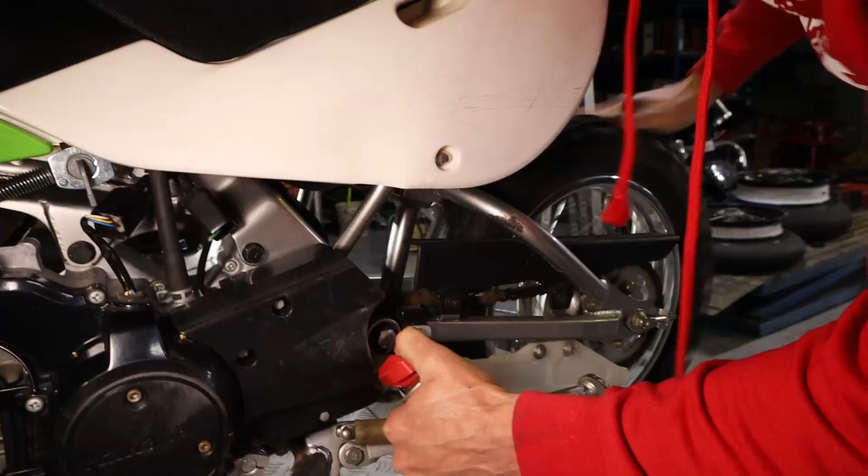Hey Roo, what are we up to today? We're going to be doing some dyno testing, hopefully making some ponies. We don't know what this makes, keeping in mind we've got to account for altitude and humidity, but these numbers on this dyno are what we'll be comparing to throughout the rest of the series.

What people need to bear in mind is that a dyno is just a tool. My dyno will read differently to someone else's dyno. There's guys out there whose bikes make a hundred thousand zillion million horsepower, but on this dyno it's pretty shy, it underreads quite a bit. That's not a problem though, because at the end of the day we're just comparing our own figures against our own figures.

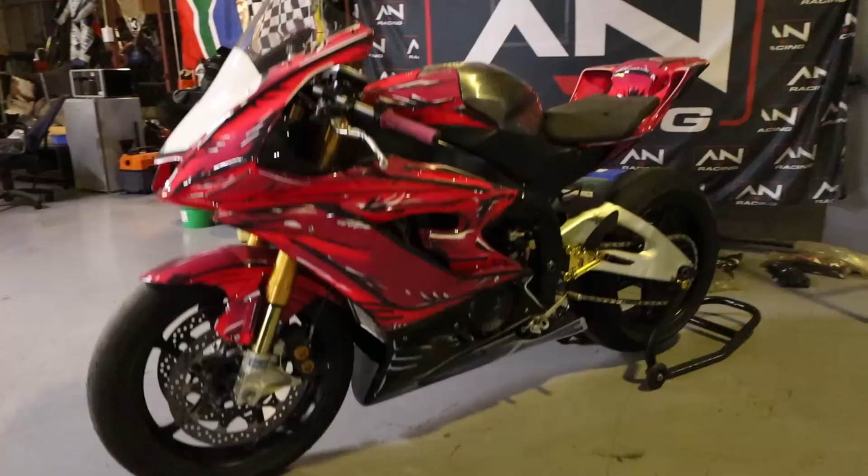So this is going to be stock KLX, stock figures. We also plan on drilling out the exhaust, and maybe trying out one or two little tricks. Yeah, some hillbilly backyard mechanics.

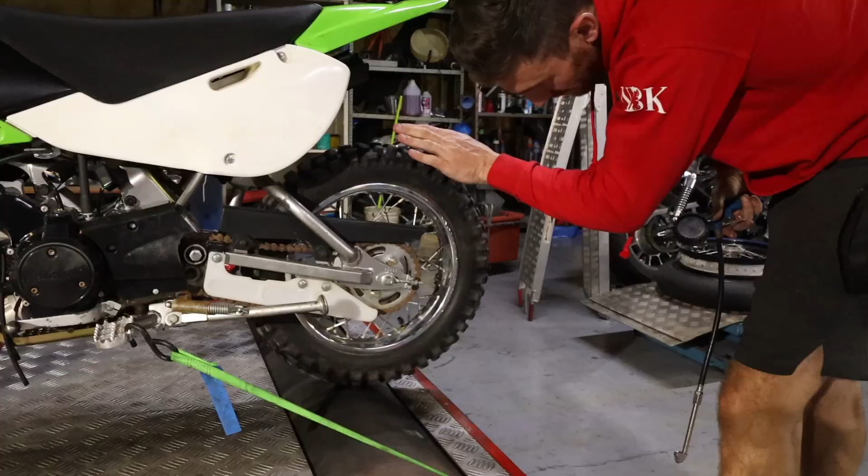Personally this is my first time dyno tuning, so I didn't know the process, but it's nice and quick. Aston just quickly calibrates the dyno to the bike, then it's time for some testing.

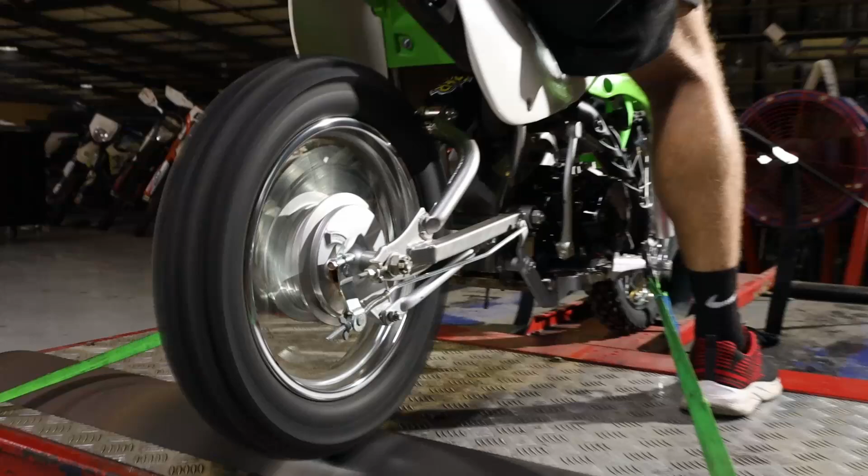Damn! Okay, let's see if we can give this another run. Okay, let's get it done.

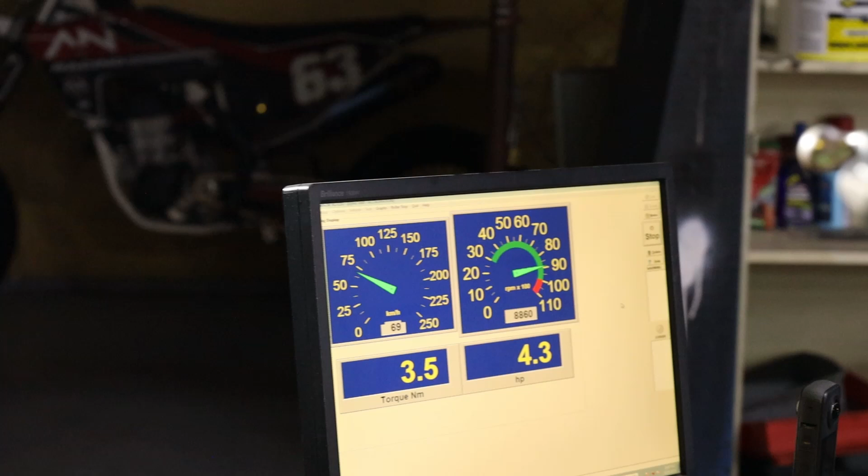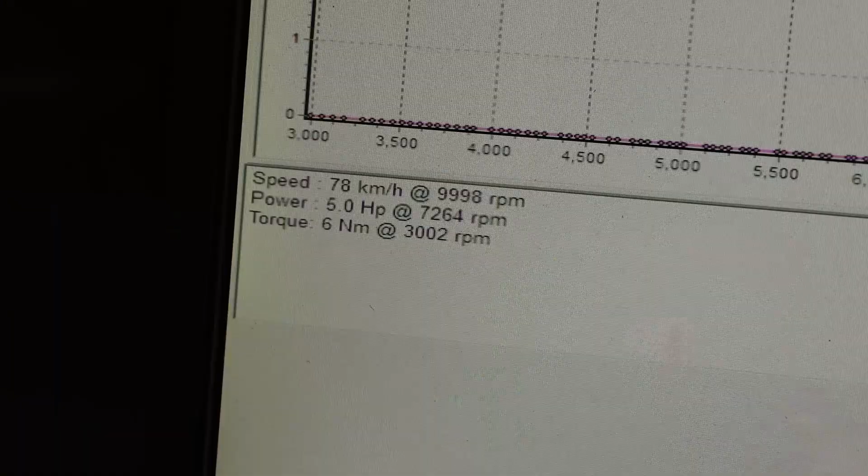Okay guys, looks like we've gotten 5 horses, 5 of them ponies. We're going to put a little bit of chain lube on. You saw how this chain looked earlier in the series, so hopefully we get a little bit more horsepower.

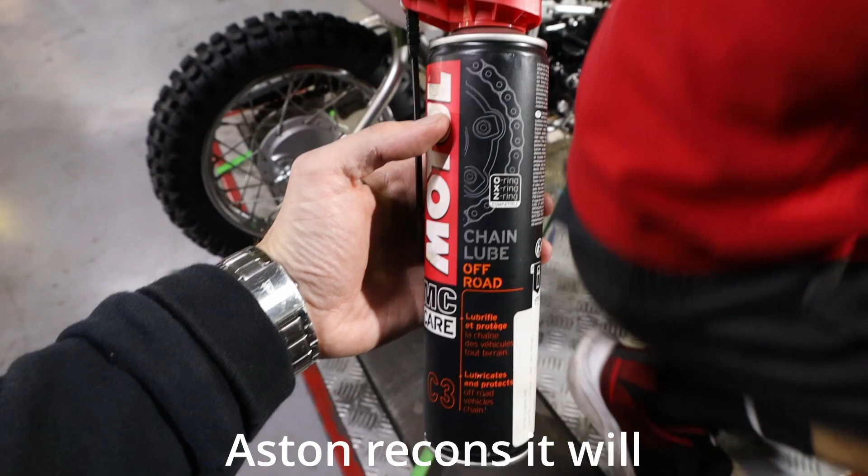Should do it. First run might be a bit down because it was idling now and the fan wasn't on.

Well, here we go, the proof's in the pudding. The chain lube works. So Motul, we're not sponsored by you, but if you do want to sponsor the channel in the future, we're always open to it.

5.3, okay, that I can't believe. We've actually gained like 0.3, 0.4 of a horsepower just by lubricating the chain. So every little bit's going to count on this build.

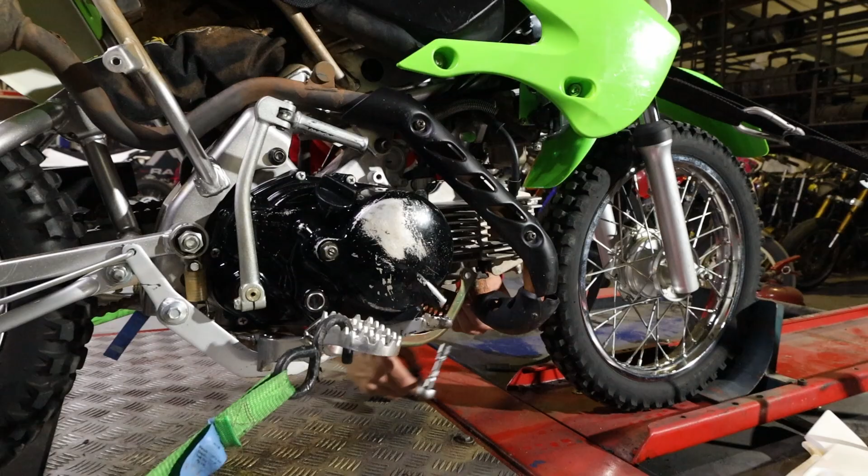We're actually about to pull the exhaust off and drill it out. Hopefully we make a little bit more power. Aston's busy pulling the pipe off now, we're going to try drill out that stock exhaust there and see if we can get any horsepower gains.

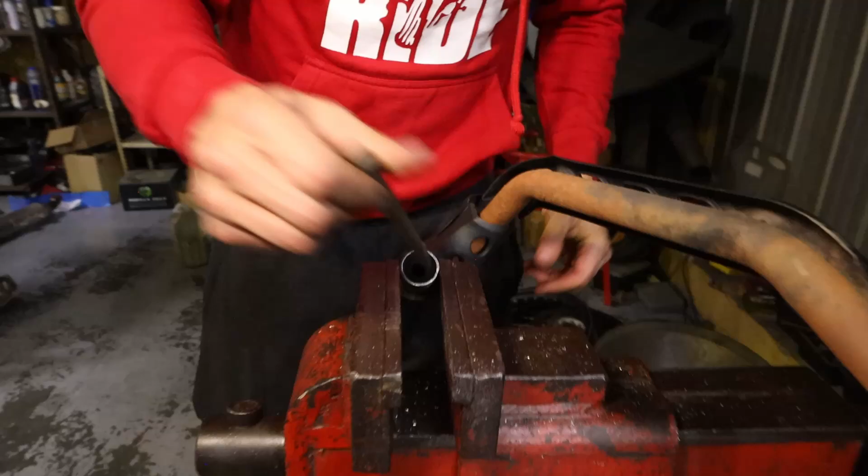Aston, what do you think about the stock exhaust hole here? I can't believe how small it is. No wonder it only made 5 horsepower. Shame man, it needs to breathe, brother. We need to make some power.

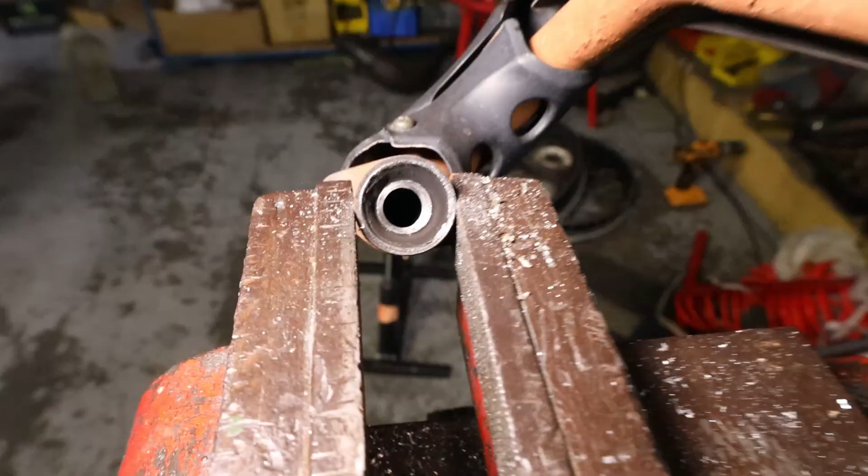Okay, so we're already making some space here, but we're going to go with the die grinder now, see what we can do.

Yeah, we see the red dot, now we're live, there's a red dot there. Alright sick, okay, we're going to do some predictions.

Aston, what do you think? I reckon we're going to gain another 0.6 of a horsepower. We started at 5.3, I think we're going to go to 5.9. Okay, Aston reckons probably about half a horsepower. We are still restricted at the back, but we've just opened up the front. So bear in mind, half a horsepower on 5 horsepower is like 10%, so that's actually massive. You think half a horsepower is not a lot, but on this bike it's huge.

Alrighty. Starting with nothing.

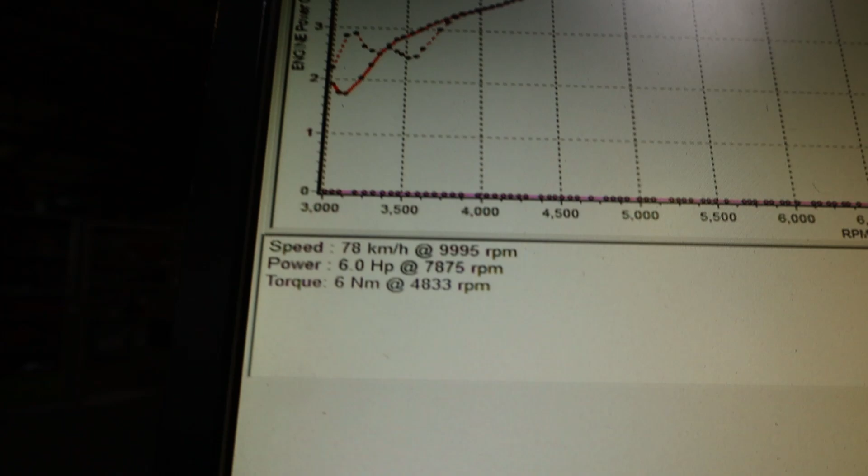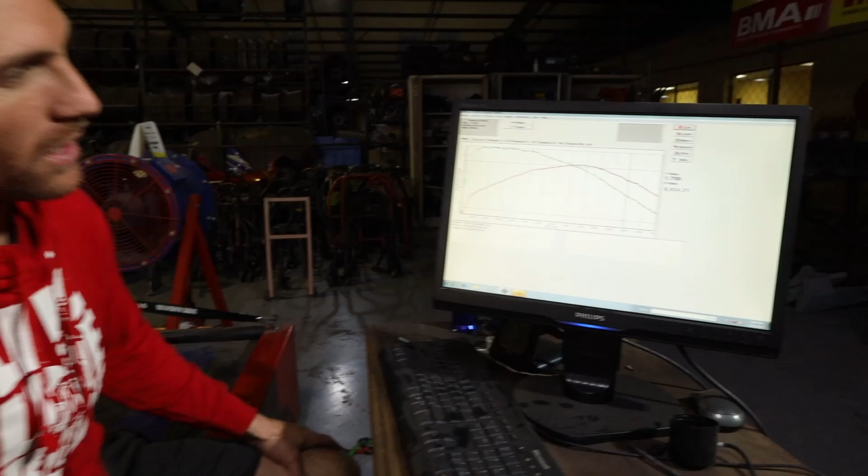Okay, sweet guys. So what we're looking at here, this is our base run. So we're sitting at 4.8 horsepower and 6 Newton meters of torque. The red line is your horsepower graph, and the green line is the torque.

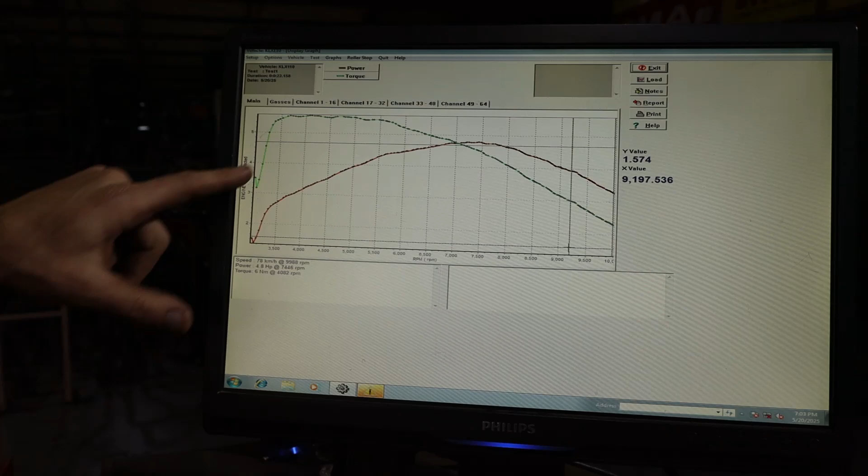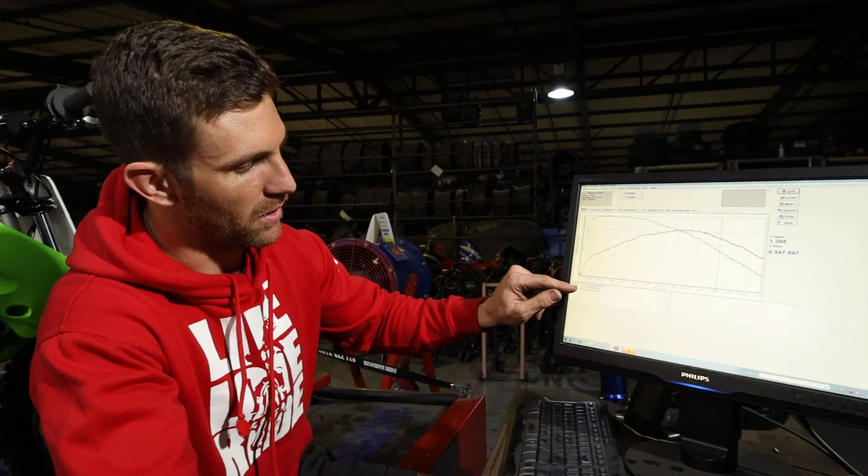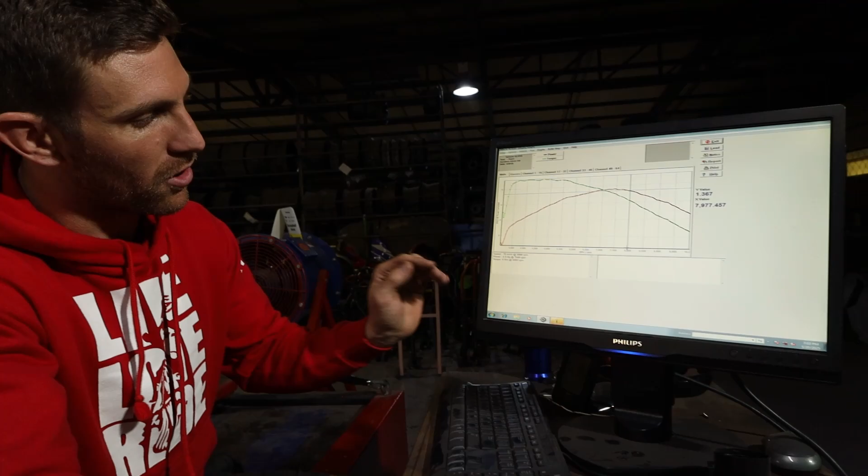So what you'll see is if you are measuring in horsepower and Newton meters, some guys measure in kilowatts and foot-pounds of torque. But with horsepower and Newton meters, your graphs always intersect at 7,000 RPM. So it's just a fun fact. Any dyno graph with horsepower and Newton meters, the graphs always intersect at 7,000, unless the graph is cut short. What we're looking at here is we started the run at 3,000 RPM.

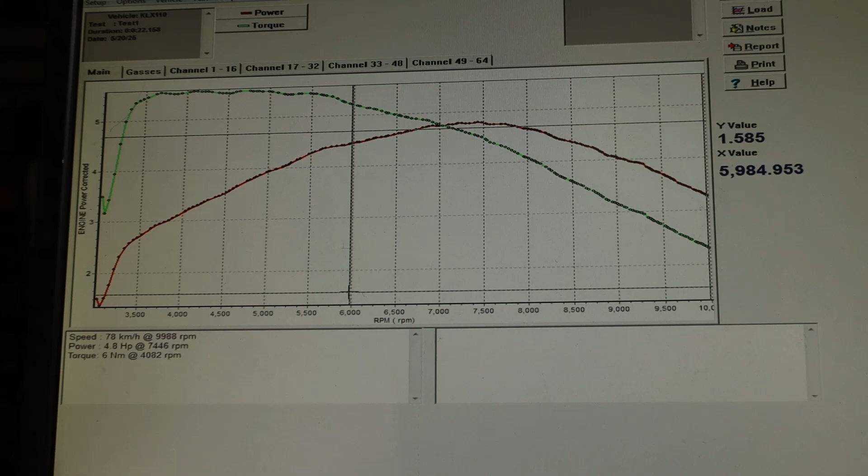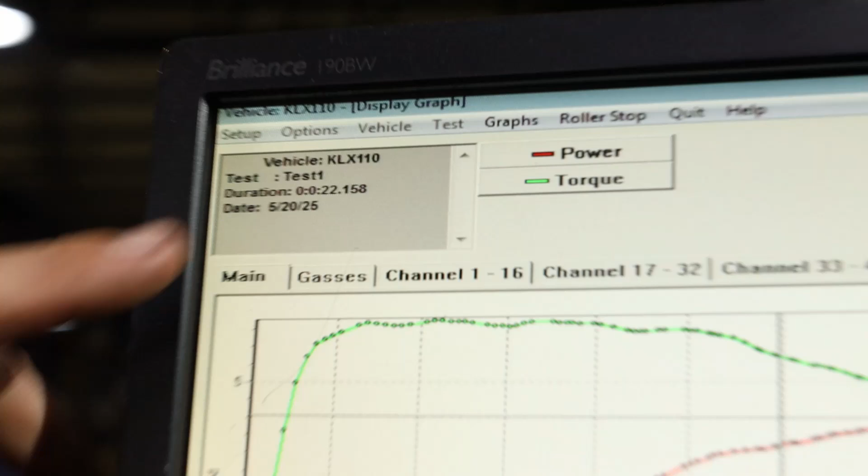We ran it to 10,000, and that gives us an elapsed time over that RPM range. So even if we don't see a change in horsepower or torque, we may see a change in the run time, which is always fun to look at. So what were we doing stock there? Stock is a 22.158 second run.

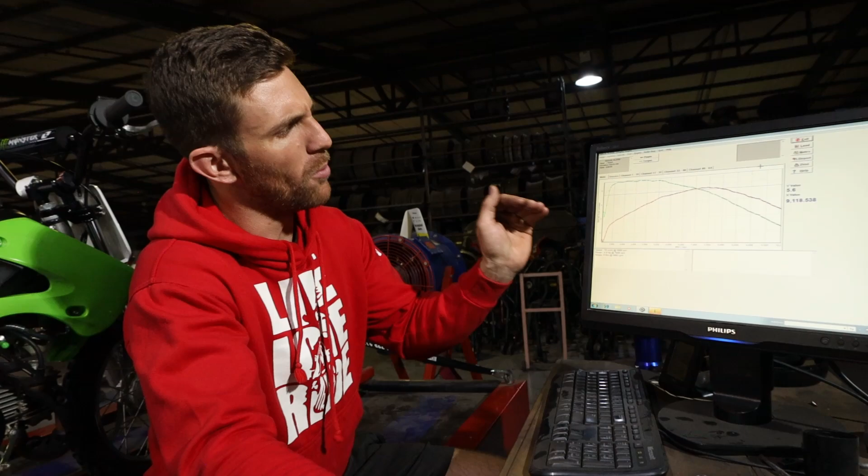Basically before we had lubed the chain, the bike will warm up and it'll probably gain 0.1 or 0.2 of a horsepower. But then after that we lubed the chain, and we got it from, let's see here, I think we got it from 5 horsepower to 5.3 horsepower. So this here is the difference.

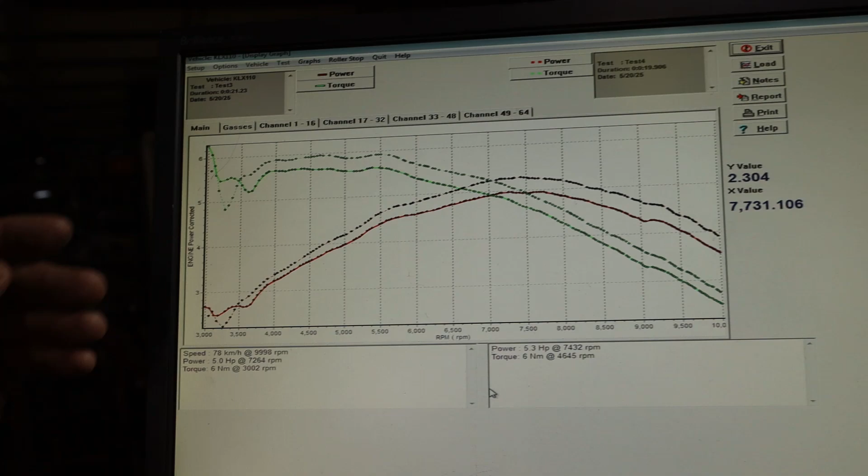So these are two graphs, two runs overlaid on top of one another. Your dotted lines are the run where we put the chain lube on, and the solid lines were the previous run, just before that. Okay, so already a pretty decent gain.

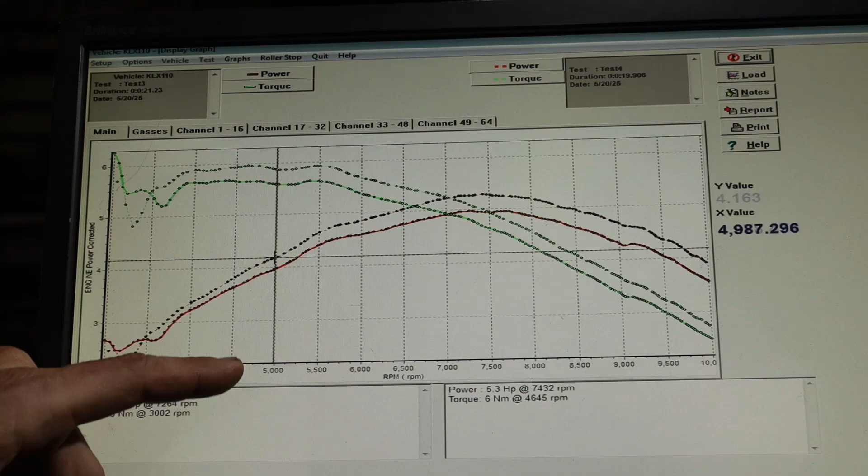Across the rev range, if you look at, let's say we take 5,000 RPM, with no chain lube, we are sitting at 3.9 horsepower, and then with the chain lube on, at the same RPM 5,000, wow, 4.163 horsepower. So 0.3 horsepower gain basically across the board.

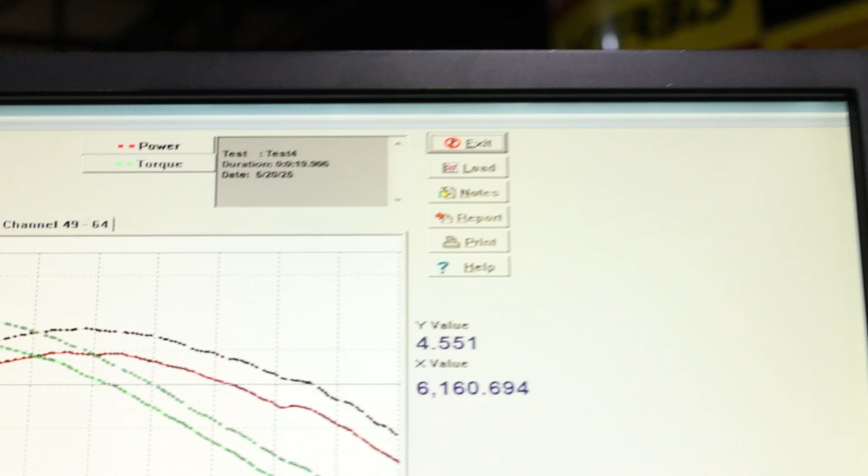And what's cool about that is that translates into your change in elapsed time from 3,000 to 10,000. So we went from a 21-second run down to a 19-second run. Almost 2 seconds, just by putting on chain lube. So that's why when your mechanics tell you to lube your chain, make sure your air filter's clean, all that type of stuff, it's actually for your own good. So maybe take the advice.

Take the advice, guys. And then after that, we did some modifications where we took the exhaust off and just drilled it out and tried to match the exhaust to the exhaust port itself. Take test 4 over here and then give our max power, which I think was test 9. So yeah, we actually had a massive gain.

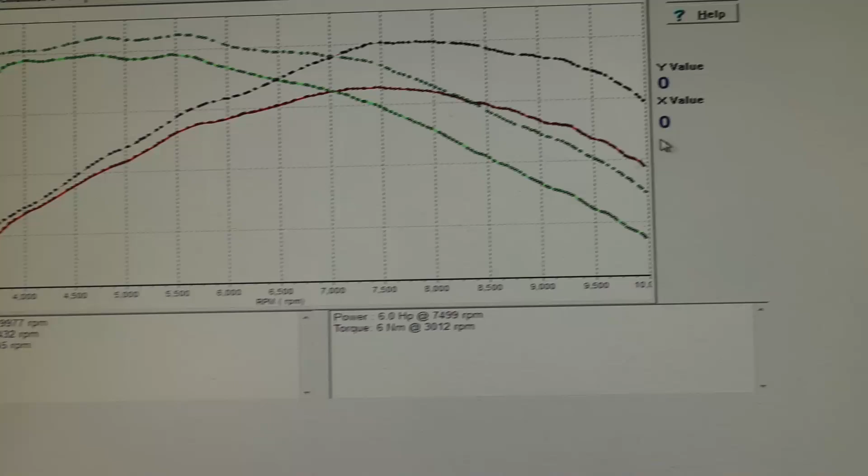Ooh, so that's huge. I mean, our runtime went from 19.9 down to 17.8. So we dropped another 2 seconds. And that's over and above the chain lube. So yeah, incredible.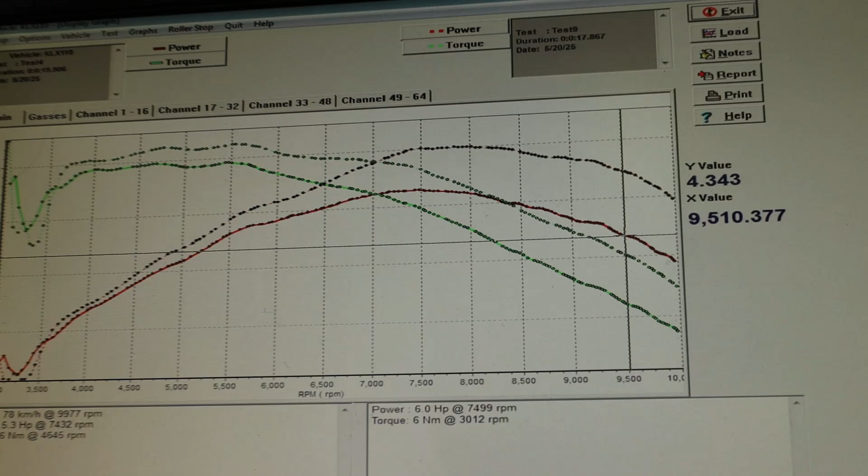So you can see, where would our biggest gain be? Probably 9,500 RPM. We were making 4.3 horsepower, and now we're making 5.4. So over a horse gain. That's incredible, impressive.

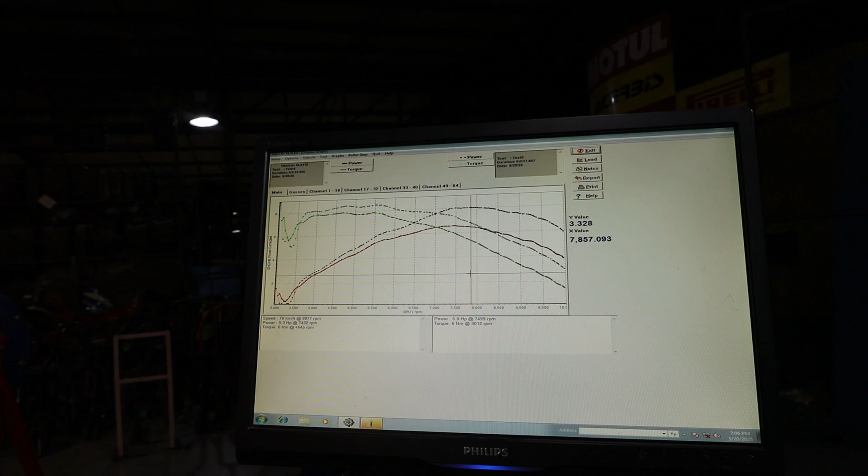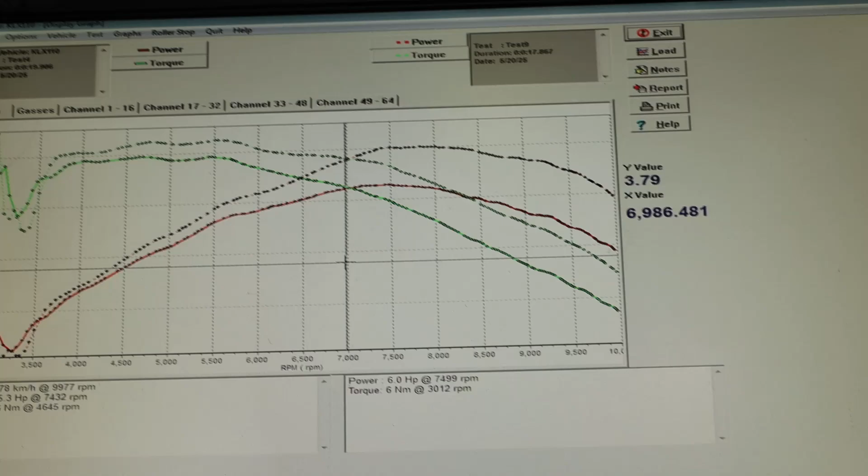We didn't actually get to the rev limiter, but there was no need to run the bike any higher than this because our peak power was achieved at around 7,500, which is, according to the engineers, where it makes power, how it was designed. Yeah, so quite impressive.

Minor modifications and some big gains. So cool stuff. I think those gains aren't bad at all. Obviously there's more power to be made out of this little machine. So in the comments below, let me know what mods you guys want to see and we're gonna do them.